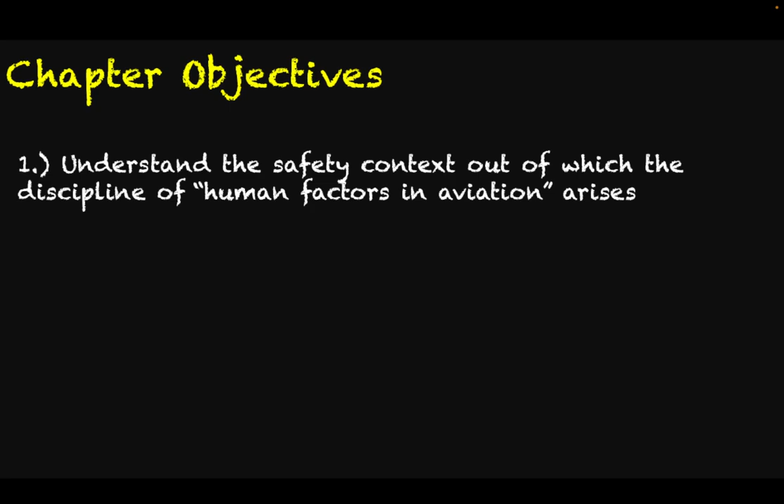So, more than anything else, you're asking, why do I have to take this class? Well, what we need to understand in this chapter is we need to compare the safety record of aviation against those other modes of transportation like driving, taking the train, taking a boat. You've heard your whole life that flying is the safest way to travel, and that's absolutely true. But at the same time, air travel is not 100% safe. Nothing is ever going to be 100% safe. Accidents do happen. So we also want to understand the types of aircraft accidents that do occur and the types that are statistically the most likely to occur.

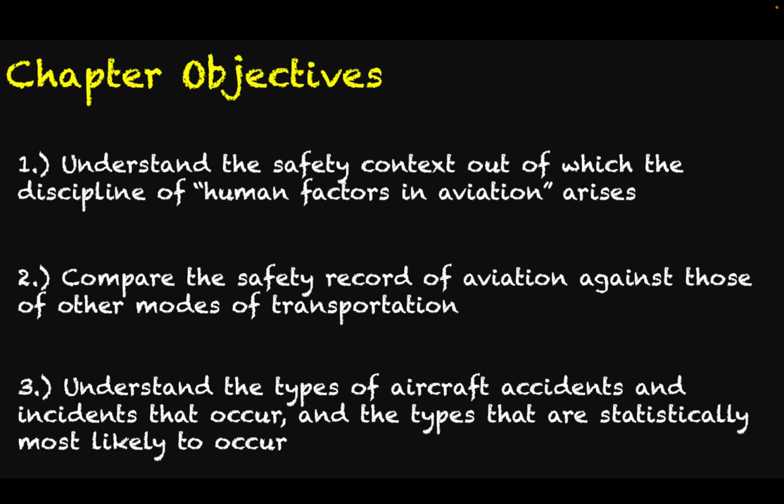And once we get through that, you're going to understand why you're having to take this class, because, not to give away too much, but we are going to find that pilot error, mismanagement of resources, poor decision making, lack of skill, these are all things that are disproportionately most likely to cause an accident. And that's why we need to study the human body. We need to be aware of what we're capable of and what we're not capable of so that we can make the proper decisions when we are in the aircraft.

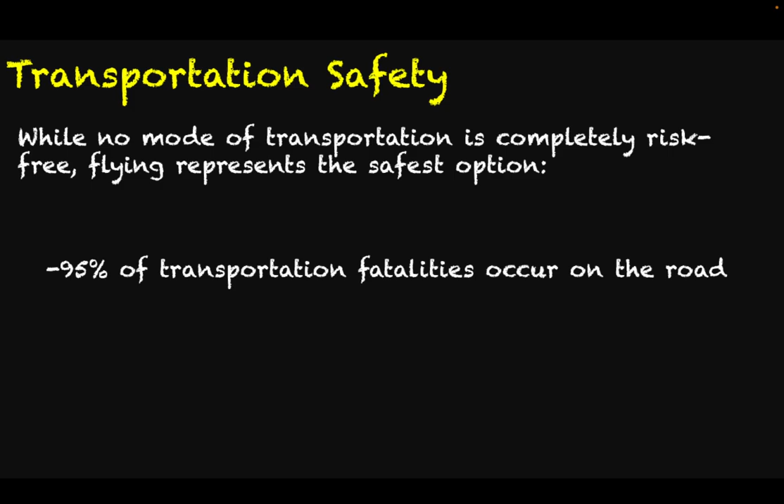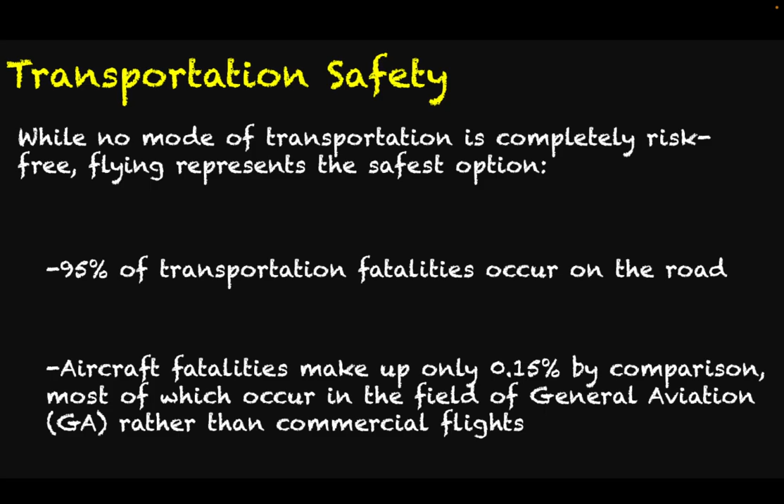So, like I said, no mode of transportation is going to be 100% risk-free, but flying does represent the safest option for sure. So about 95% of transportation fatalities occur on the road, and aircraft fatalities only make up a very small percentage by comparison, only about 0.15%, which is about 15 out of every 10,000. So if we split aviation up into two categories, being general aviation and commercial flights, and we'll better define these here in just a minute, most of these are going to occur in the field of general aviation. So there's lots of reasons why commercial flying is quite a bit safer than general aviation, and we will touch on that a little bit later.

So civilian aviation, like we just said, is divided up into two categories. We have general aviation. This is all civilian, meaning non-military flight operations other than scheduled commercial air passenger and/or cargo service flights. So this can include anything from recreational flights, sightseeing, instructional flights, corporate transit, and on-demand charter flights.

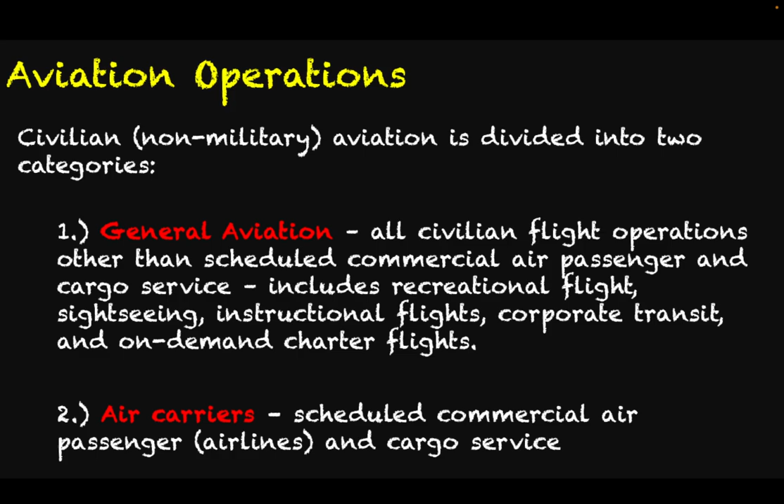And then air carriers are going to consist of two basic things: the airlines and cargo service. So for commercial airlines, you're talking about flights from Los Angeles to New York, and there's 300 people on board. Cargo service is going to fly very much the same kinds of planes, these very large turbojet planes, but they're going to be the ones that say, like, FedEx or UPS on the side. They're not really carrying people so much as they're carrying cargo.

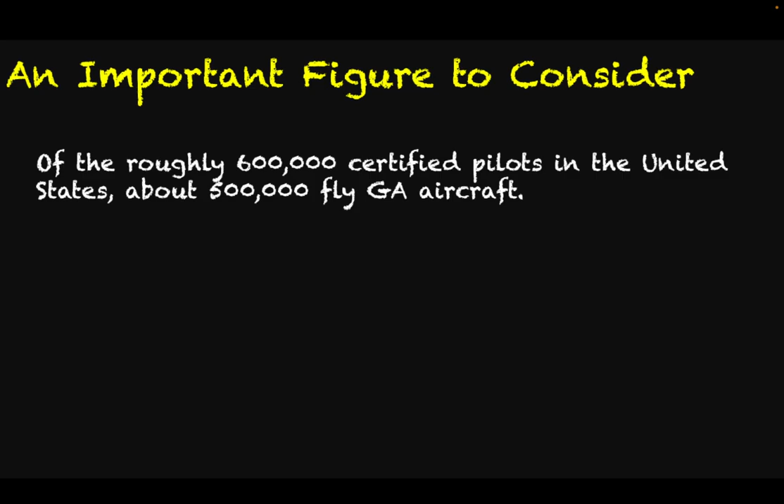So, of the roughly 600,000 certified pilots in the United States, about 500,000 fly general aviation aircraft. So, disproportionately, if you consider the entire fleet of aircraft in the United States, most of them are GA aircraft rather than commercial fleets. So the conclusion we can make is, just based on the number of takeoffs and landings, aircraft incidents and accidents are much more likely to involve GA aircraft just based on volume. So there's a lot more GA aircraft, and they're doing a lot more takeoffs and landings. Their flight times tend to be a lot shorter than what you see with air carriers. So just based on those data alone, it seems much more likely that you're going to have accidents, incidents, whatever you want to call them, with GA aircraft versus commercial aircraft.

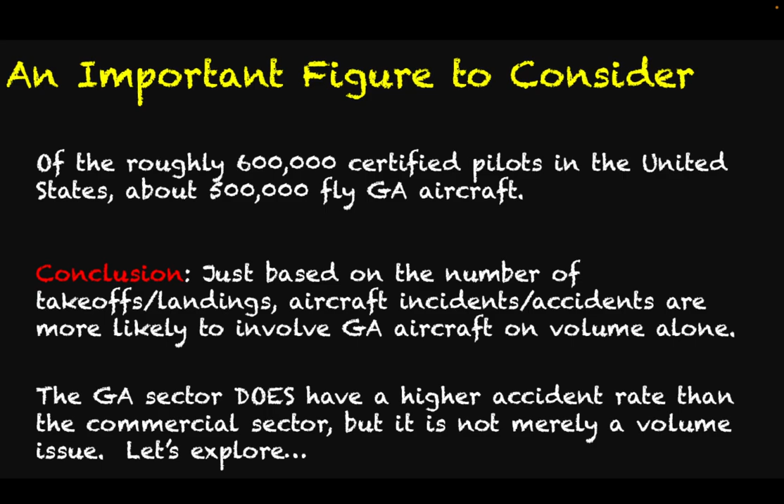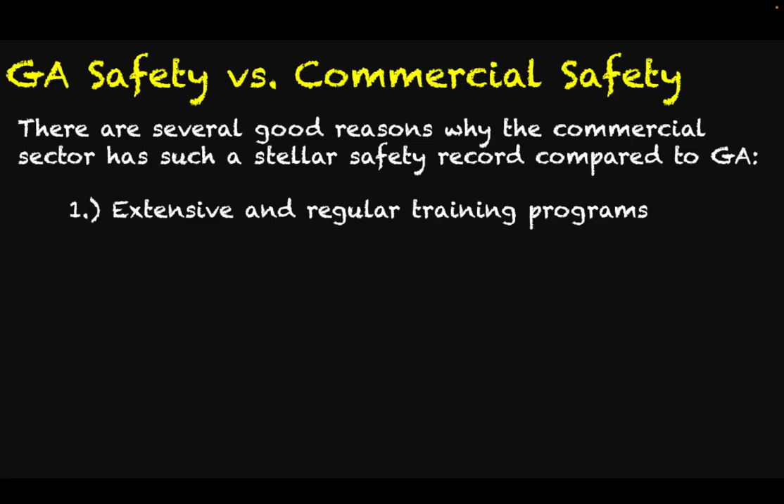But what we're going to see here is that it's not just a volume issue. The GA sector does have a higher accident rate than the commercial sector. So let's talk about safety in the GA sector versus safety in the commercial sector. There's actually several good reasons why the commercial sector has such a great safety record compared to general aviation. Number one, there are extensive and regular training programs available and required of commercial airline pilots that are not required of or maybe available to just regular GA pilots.

Number two, we have routine high quality maintenance on higher end multi engine aircraft. So not only are the commercial fleets flying much larger, much safer, much more sophisticated machines, those machines are being tended to in a much more careful, much more regular and much more methodical way than, say, just a Cessna that's sitting in a hangar at the airport.

Commercial airlines tend to have larger flight crews, so 2 or more experienced pilots. Whereas it's possible for a GA pilot to just hop in his airplane and then go fly solo. So, what that means is that for the GA pilot, if he or she is all by themselves, there's a lot of decision making, tasks that need to be accomplished, some of those being mental tasks. So it is all on that person to always make the right decision, make the right reaction to given visual references and things like that.

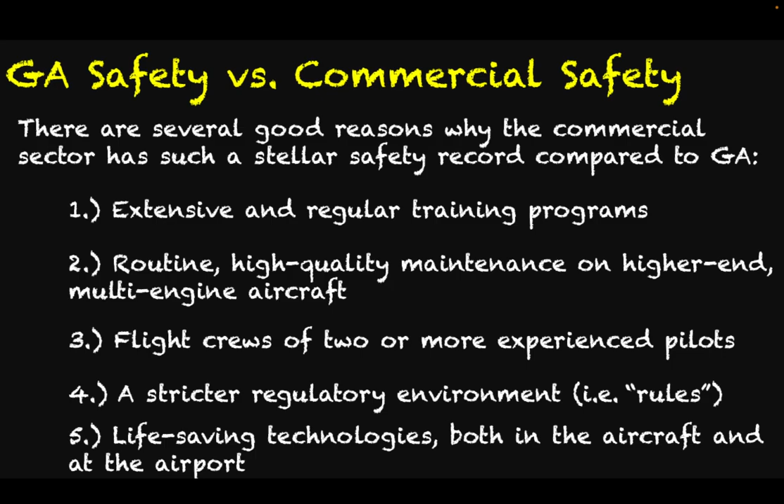Whereas on the commercial side, because you have 2, 3, or even 4 people in your flight crew, there is communication back and forth. Everybody is a part of the decision-making process. There are checklists that everybody can run through to make sure that everybody is making the right decisions at the right times. As you can, I'm sure, imagine, the commercial side of things has a much stricter regulatory environment, aka the rules. And then number 5, there tend to be life-saving technologies on board commercial flights that are just maybe not present in GA aircraft. Things like collision avoidance technology, terrain detection technology, and things of that nature.

So if we want to focus on some of the commercial regulations so that we have a better understanding of why commercial aviation just tends to be so much more overwhelmingly safer, they have standard operating procedures, and these manifest themselves as checklists that basically spell out a step-by-step list of instructions for every phase of flight, and this is intended to minimize the risk of missing important steps, skipping important steps, misreading or misinterpreting certain steps, and this is where having a larger flight crew also lends itself towards being a bigger benefit as well. If you have multiple people as part of the checking off process of going through these lists, that minimizes the risk of error, and it won't totally mitigate the possibility of an accident, but it will greatly reduce it.

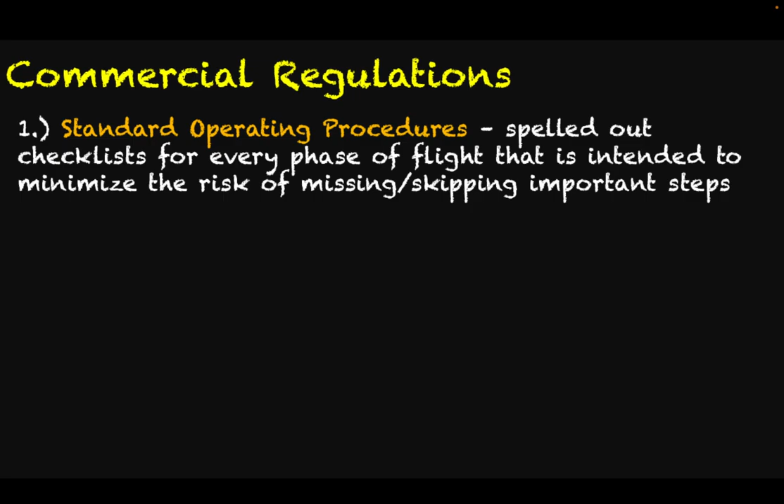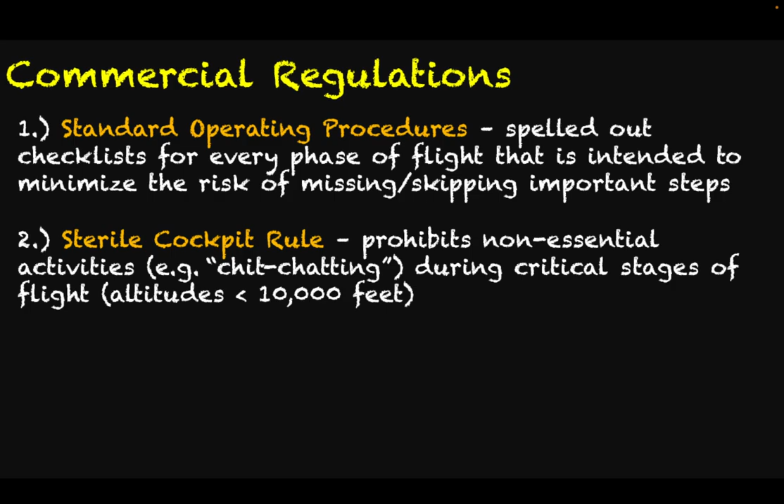There is what is called the sterile cockpit rule, which prohibits non-essential activities. Usually you're talking about things like chit-chatting, shooting the breeze, things like that, during critical stages of flight. And usually by critical stages of flight, we're talking about altitudes that are below 10,000 feet. So once you're up at cruising altitude, the sterile cockpit rule doesn't really apply. But when you're that close to the terrain, you have to be basically laser focused on what you're doing, your bank angles, your flaps, and things like that, to make sure that you are doing, from a regulatory standpoint, all the right things to ensure the safety of the crew and of the passengers as you fly.

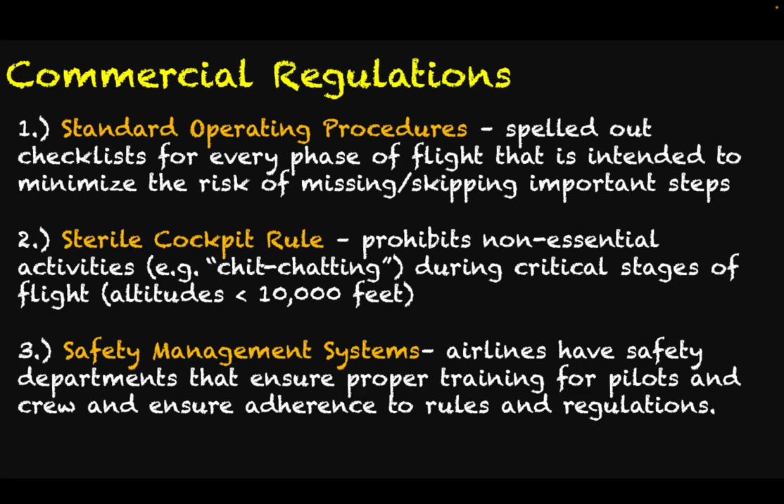There are safety management systems, so airlines have safety departments that ensure proper and regular training for pilots and crew to make sure that when you're talking about things like rules and regulations and standard operating procedures, everybody knows what they're doing, what they're supposed to be doing, and how to do it. So the strict regulatory environment of commercial flight is meant to mitigate problems that result from human limitation and error. So the biggest takeaway from this chapter is hopefully going to be, if there's going to be an accident involving an aircraft, it is overwhelmingly likely that it is going to be because of the actions or inactions of the pilots involved.

We tend to sometimes think about airplane crashes or airplane incidents that involve mechanical failure, an engine flaming out on you, hydraulics going out on you, the tail falling off, the rudder not working. So these are all mechanical failures that have nothing to do with human limitation and human error. But those things are overwhelmingly much more rare compared to incidents that involve humans making mistakes, okay? So that is one of the most important takeaways that you're going to get from this chapter. It is almost certainly going to be human error that causes an accident versus something like a mechanical issue.

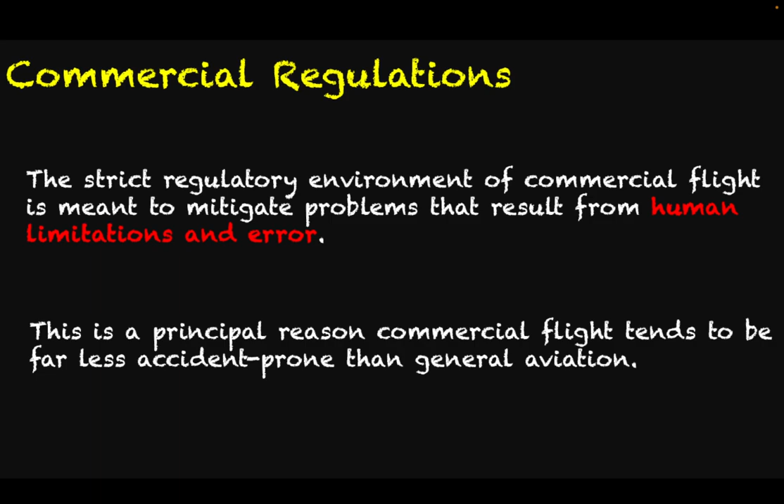So this is a key and critical reason why commercial flight tends to be far less accident prone than general aviation, because of everything that we just looked at in the previous slide. There are steps and regulations and technologies that are in place in commercial aviation to mitigate the possibility of human pilot error becoming a causal factor in an accident.

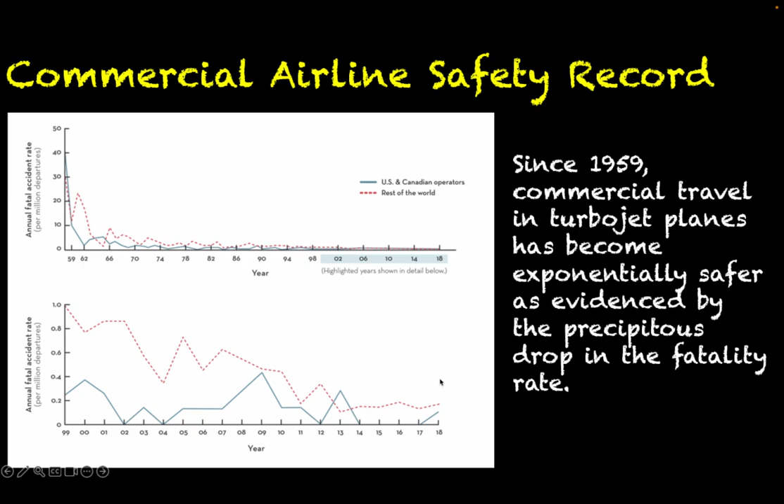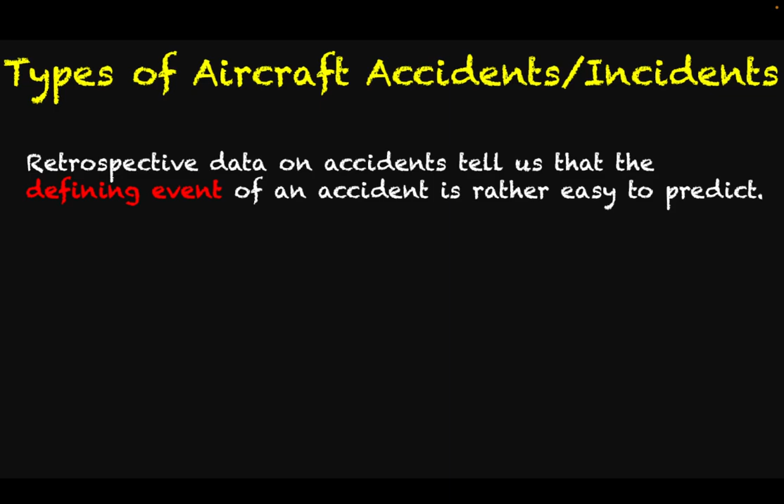So now let's switch gears a little bit and talk about the different kinds of aircraft accidents and incidents so that we can better understand what part of those accidents and incidents is most likely to be caused by human error, that is, action or inaction of the pilots involved. Retrospective data on accidents tell us that the defining event of an accident is actually kind of easy to predict. So, statistically speaking, some types of accidents are more likely to occur than others.

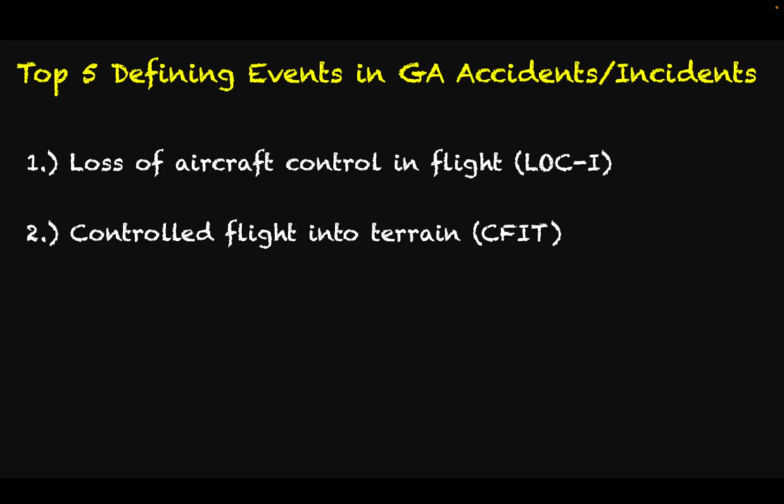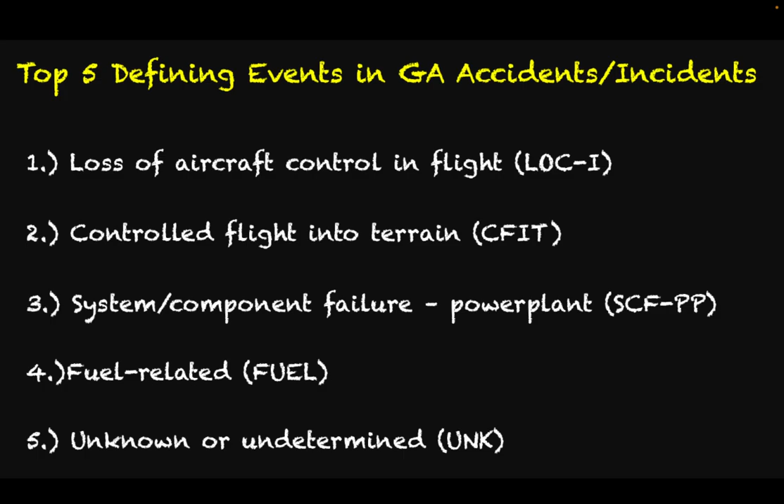So the FAA compiles a list of the most common defining events in accidents and incidents. The most common and most likely kind of accident is called loss of aircraft control in flight, or you can call this LOC-I. Second is controlled flight into terrain, or CFIT. Third is a system or component failure involving the power plant or engines, so this is SCF-PP. You have fuel-related incidents, which we will talk about a little bit later. That's not strictly one kind of thing, but multiple kinds of things. And then unknown or undetermined. So sometimes accidents happen and we just can't really figure out exactly what went wrong.

And then there are other defining events in GA accidents and incidents, so it's not just the 5 that we just looked at. The 5 that we looked at on the previous slide are the most common. So there is actually a laundry list of types of defining events or occurrences involving system component failure that don't involve the engine, unintended flight into instrument meteorological conditions, which basically means that you lose your visual references because it's nighttime or because it's cloudy. Mid-air collisions, low altitude operations, so you're flying a lot lower than you're supposed to, or there's others as well.

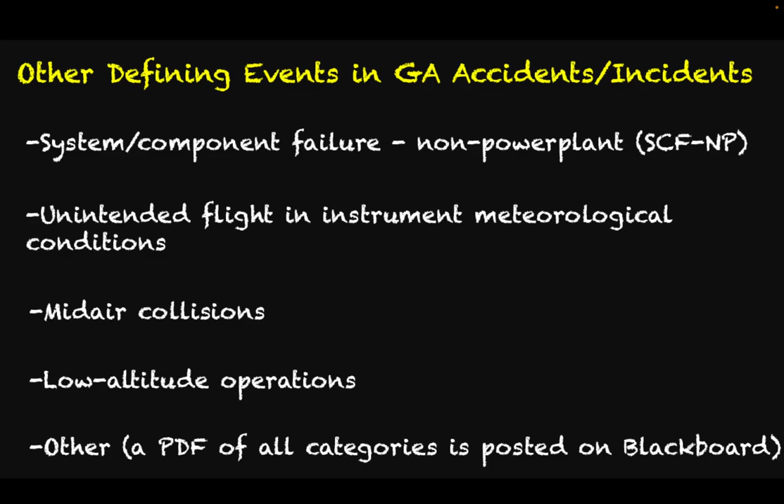And to help you understand some of these occurrences and some of these defining events, I posted a PDF of all the different categories of occurrences and defining events on Blackboard. Take a look at that. That will provide definitions and some important context that should help you understand what these things are and why the 5 that are most common that we looked at are the most common.

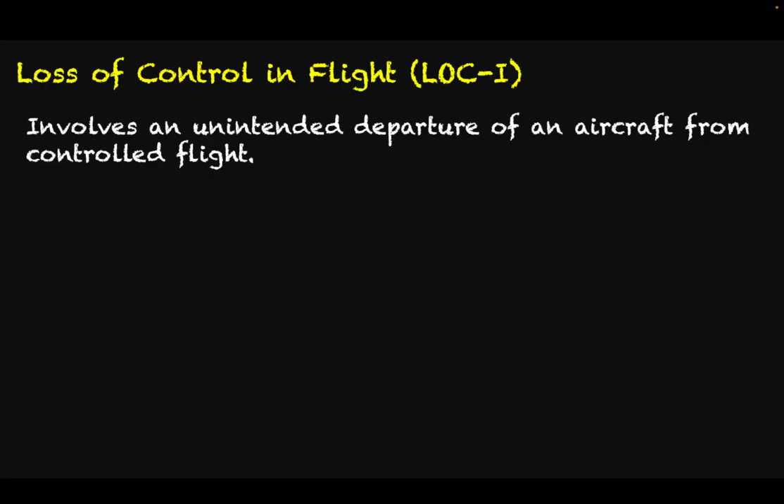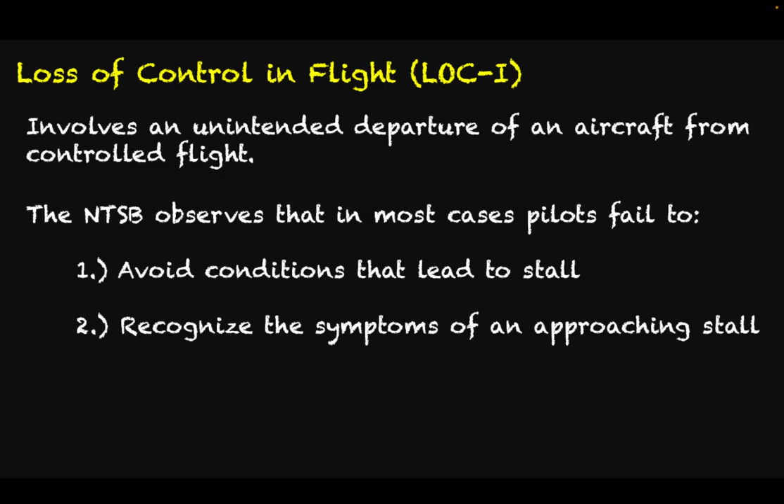So real quick, let's take a look at loss of control in flight and understand what that is all about. So LOC-I involves an unintended departure of an aircraft from controlled flight. So basically, you lose control of the aircraft for whatever reason, okay? So the NTSB observes that in most cases of LOC-I, pilots fail to, 1, avoid conditions that lead to stall, 2, recognize the symptoms of an approaching stall, and 3, use proper stall recovery procedures.

Now, of course, we know that stall involves things like loss of airspeed, inappropriate attitude of the airplane. So basically, you get to the point where the airplane cannot generate the lift to keep itself airborne, and it's going to start falling out of the sky. So these three things that you see right here are going to obviously cause you to lose control of your aircraft, okay? But this, again, becomes kind of a training issue. It becomes a compliance issue. Understanding how your airplane operates and how to handle it so that you can mitigate the risk of stall.

So, in other words, this occurrence is an issue of human cognition and decision making, okay? So, when you're learning to fly, you learn all about aerodynamic stall and how to avoid it at all cost. What sorts of things should you be doing to avoid stall? What sorts of things should you not be doing to prevent yourself from stalling?

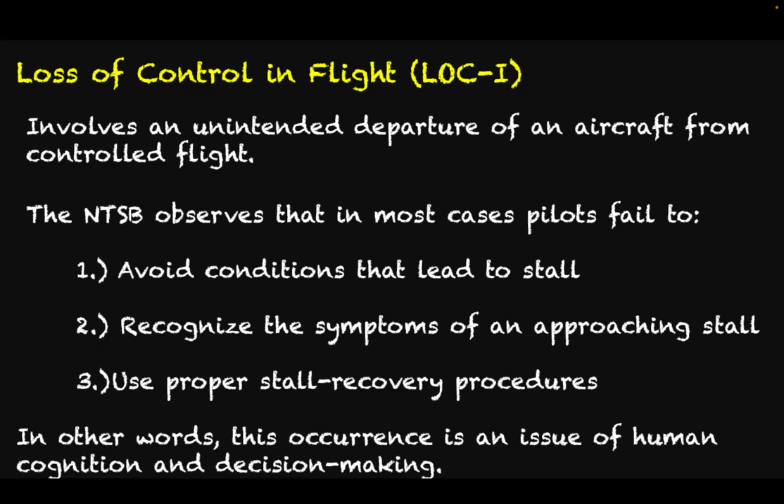So again, this becomes an issue of human cognition and decision making, which we are going to eventually see is a human physiological issue. You need to understand how your body operates and how your brain works so that you can understand, okay, I may think I can get away with a certain attitude or a certain bank angle or a certain airspeed so that I won't stall, but your brain is flawed. That's kind of the main thing I'm going to try to get across to you in this class. The human body is an amazing thing that's capable of amazing feats, but the human body is flawed, okay? So if nothing else, you need to trust your training and trust your instruments. They basically are going to know better than you.

Okay, so let's lay out a couple of definitions so that we can understand the sorts of contributions that different conditions make to the two most common types of aircraft defining events, LOC-I and CFIT. So the first definition we're going to have is VFR, which stands for Visual Flight Rules.

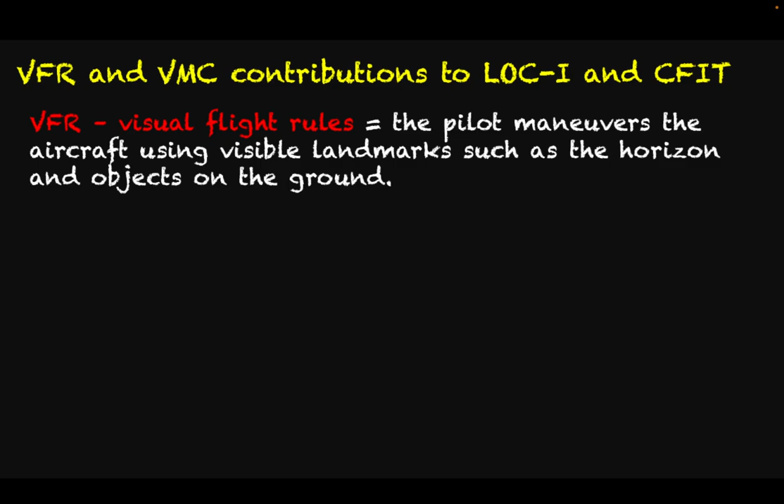So this is going to involve the pilot maneuvering the aircraft by using visible landmarks such as the horizon and objects on the ground. So basically, visual flight rules are going to be applying in visual meteorological conditions, which is a meteorological state in which outside references are readily visible and VFR can be conducted safely.

So another way of putting this is that VMC is in effect when you have a clear day outside, it's daytime, the sun is shining, you can see the horizon, you can see objects on the ground. You basically can use your eyes and know that you're at level flight with the horizon. You know you're not about to fly into a mountain. You know you're not about to crash into the ground.

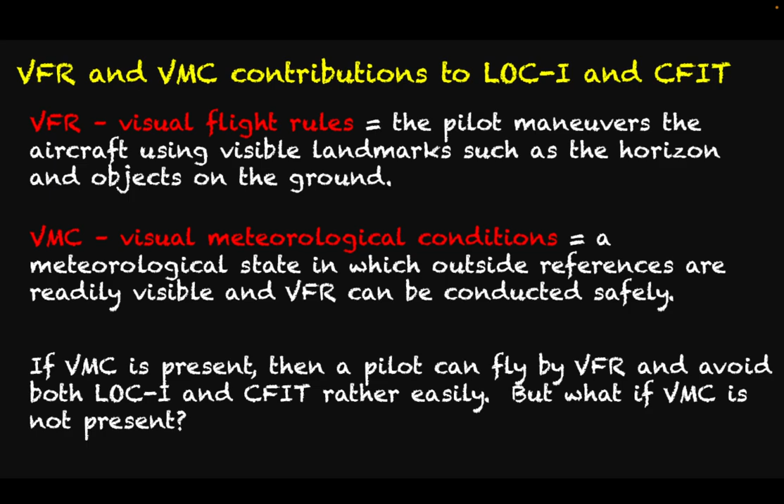So when VMC is in effect, you can fly by visual flight rules. So that's a safe thing to do, okay? So if VMC is present, then a pilot can fly by VFR and avoid both LOC-I and CFIT rather easily. But the question becomes, and this is going to be kind of a common question for us in this chapter, what if VMC is not present?

So when a pilot attempts to fly by VFR in conditions of low visibility, meaning not VMC, so it's nighttime, it's overcast, you can't see the horizon, you can't clearly see objects on the ground, that's called IMC, or instrument meteorological conditions, you increase drastically the chances of something happening called spatial disorientation, in which you're flying your airplane, but you don't really have any sense of where you are, whether you're flying level with the horizon. You could be flying straight, you could be flying straight towards the ground. You're not necessarily going to know.

So if a pilot is only rated to fly by VFR, we want to minimize the risk of spatial disorientation by making sure that we're only flying in VMC. Once you lose those visual cues, the horizon or objects on the ground, it's very easy to become disoriented. And once again, this is a physiological process. This is a process that's happening inside your brain. Your sensation of knowing where your body is positioned with respect to the ground and other objects.

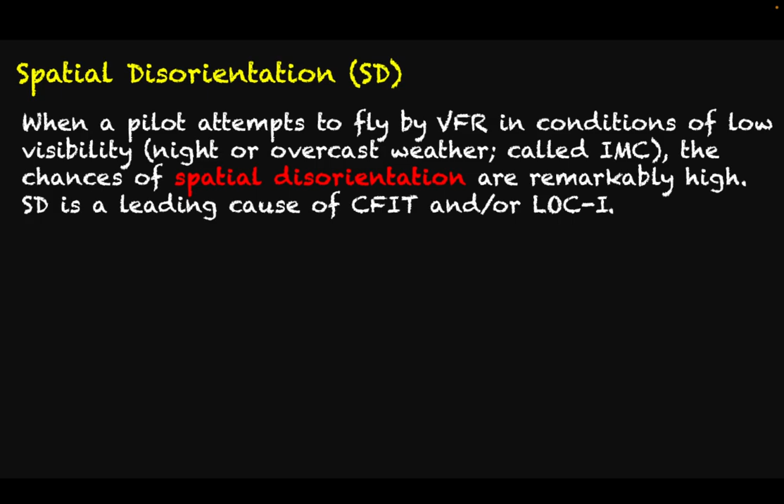So spatial disorientation is a leading cause of both CFIT and LOC-I. The conclusion we can make from this is that pilots that are not instrument rated should not fly when visual references are not available due to the increased likelihood of spatial disorientation occurring.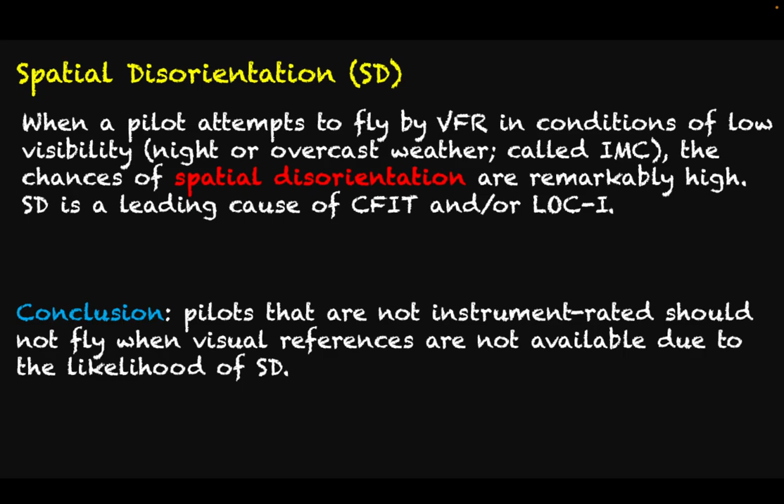So, the use of these visual landmarks during VMC to help maneuver the airplane is going to involve very fast communication using the nervous system. So, this is a physiology topic. So, with that being a physiology topic, but at the same time, with this not being a biology class, I'm not going to teach you the nitty gritty details of how communication in the nervous system works or any other physiological process, but I am going to teach you the surface level details that you need in order to understand what your body does, what it's capable, and what it's not capable of.

Okay, so let's say that you're flying by VFR and you're flying through VMC. So you're using visual references like the horizon in order to keep level flight and to keep your correct heading. So when light hits your eyeball, so this is your eyeball right here, that light is going to stimulate cells in the very back of your eye. The very back of your eye is called the retina. The retina contains a type of cell called photoreceptor cells, which absorb light that is entering your eye, such as during the daytime.

And the retina cells get excited and send a message through your optic nerve to the occipital lobe of your brain. So your brain receives this electrical message that is conveyed through your optic nerve. The brain receives that message, processes the information, forms a picture that we see, and then the image that we see after this information is processed in our brain allows us to send a message through another nerve to the muscles that are in our arms and in our hands.

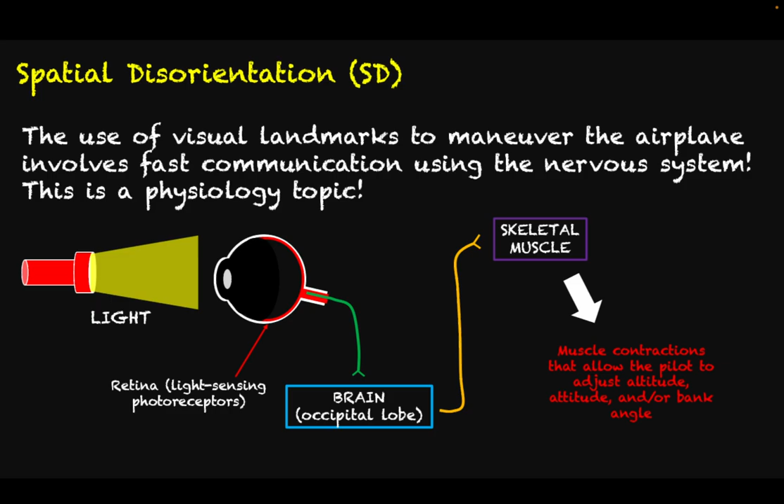So because you are changing the direction and changing the heading of your airplane based on the things that you see, we need this communication to happen very fast. And this communication, what I'm trying to get across here, is a physiological process, and that's one of the things we will explore a little bit in this class, in a later chapter, of course.

Okay, so just real quick, if we talk about fuel-related occurrences, most of these are going to consist of one of two things. Number one, fuel exhaustion, which is the aircraft completely running out of fuel, or number two, fuel starvation, in which the aircraft still technically has fuel, but for whatever reason, that fuel can't be routed to the engines. So either that is an operation issue on the pilot side, or it's a mechanical issue and the fuel's not flowing from the wings to the engine.

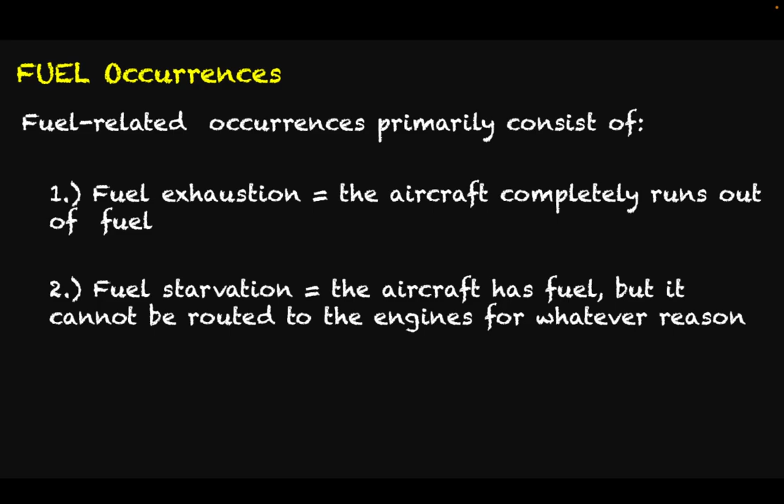So about 95% of fuel-related accidents actually entail pilot error. If you end up with fuel exhaustion, that's 100% avoidable, and that's 100% a pilot error. It's the same thing like if you're driving on the road. If your car runs out of gas, that's kind of your fault, isn't it? It's your fault that you didn't fill up your car before the lack of gas in your car became an issue, right? So that's your fault if that happens to you. It's the same thing with an airplane.

You're talking about a pilot getting cocky, thinking, oh, I can fly a little bit further without running out of fuel. So it's an overconfidence issue. And the thought process behind why you might end up with fuel exhaustion, or you might flip a switch incorrectly to transfer fuel from one side of the airplane to another, these are skill issues. These are physiological issues. They involve the function of the human body and the function of the human brain, which I've said a couple of times already. The human brain and the human body are flawed. They are limited. So understanding those limitations and always siding on caution is going to be the thing to do to mitigate risk of things like fuel-related occurrences.

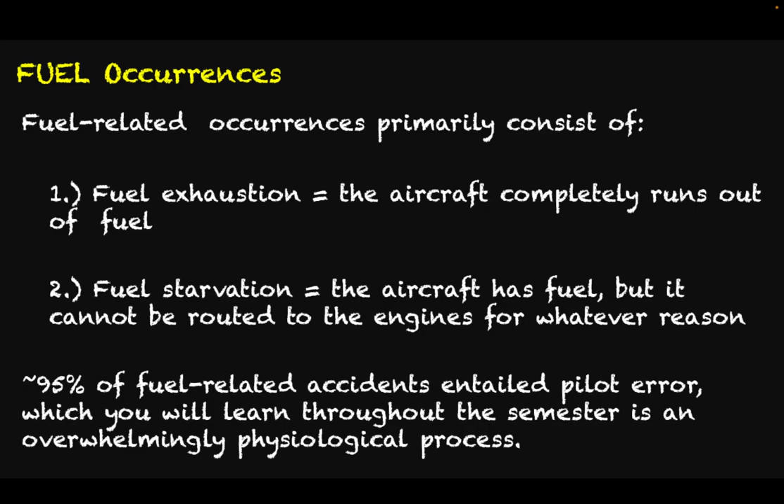So I've said it already, but I'll say it again. Pilot error is overwhelmingly more likely to be a cause of an accident than some kind of mechanical failure. Now, mechanical failures are kind of fun to depict in popular media and things like that, but they're overwhelmingly rare. Okay.

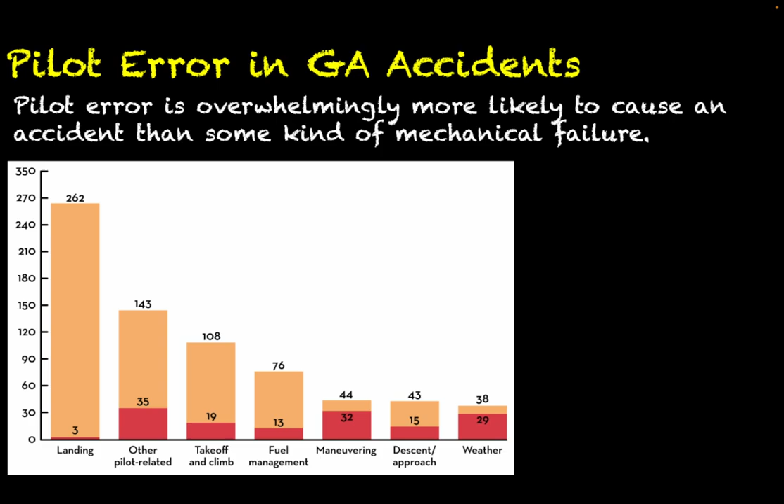So if you look at this graph here, we can see that things like landings are an issue, other pilot-related incidents are an issue, takeoff and climb, fuel management, maneuvering. A lot of these things involve pilot skill, the ability to make correct decisions, responding to things with quick and appropriate reflexes, responding to visual cues. These are all matters of human body function. So again, this implies a great importance on the study of human factors and the study of human physiology in understanding what your human body is capable of, what its limitations are, so that we can avoid these things from happening.

So the previous slide showed us that landings are most likely going to be where accidents occur, even if they are not particularly fatal. So if we go back and look at this, we can see that of the different types of accidents that occur, by far the most likely is a landing, but the red bars, which signify fatalities, of the 262 landing-related accidents that were captured in the study, only 3 of them involve fatalities.

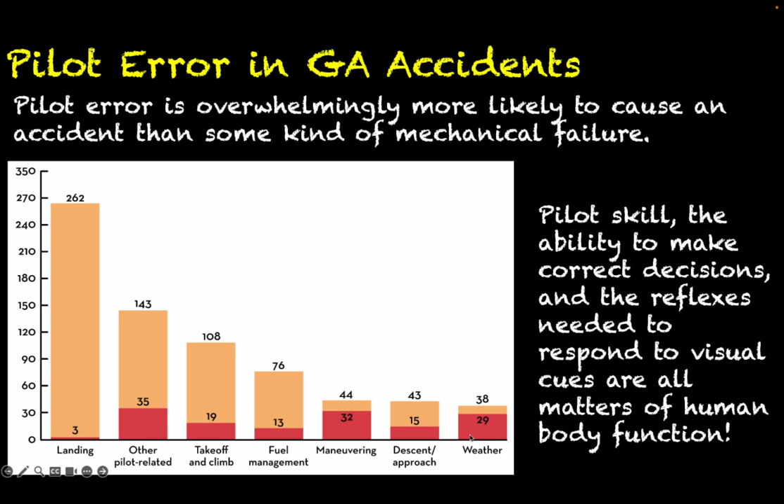Okay, but one other thing that you might find interesting here is that weather, which is not exactly a human decision-making issue unless you're talking about flying VFR into non-VMC conditions, is something that's not technically in our control, right? Even though we can control ourselves not intentionally flying into bad weather. So weather, even though it's not the most common type of accident, is proportionately the most fatal type of occurrence. So of the 38 occurrences, 29 of them involve fatalities.

Okay, so back to what we were saying, the previous slide showed us that landings are most likely to be where accidents occur. So most of the landing accidents still relate to pilot skill errors. They still relate to things like decision making and planning. So these are all human brain related cognitive events that once again necessitate the study of human physiology and the study of human factors.

So one thing you're noticing so far in this chapter is we're focusing on aviation safety, but a lot of what we're doing is definitely justifying the existence of this class, justifying the necessity of studying how the human body operates so that we can better understand how our bodies interact with the aircraft that we fly.

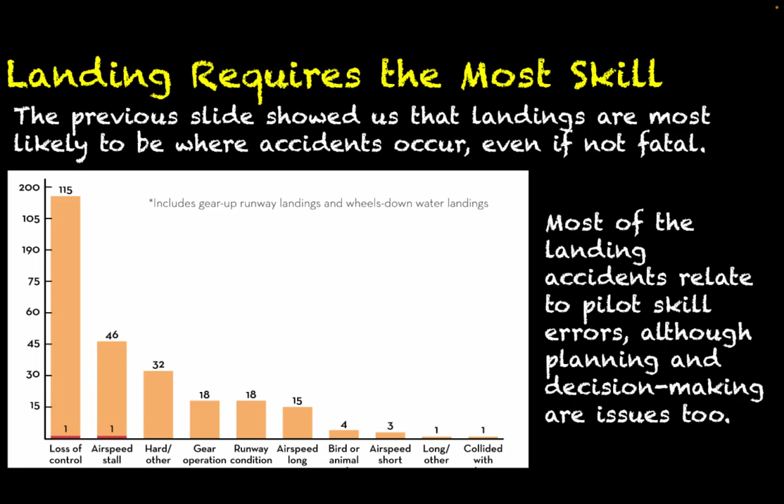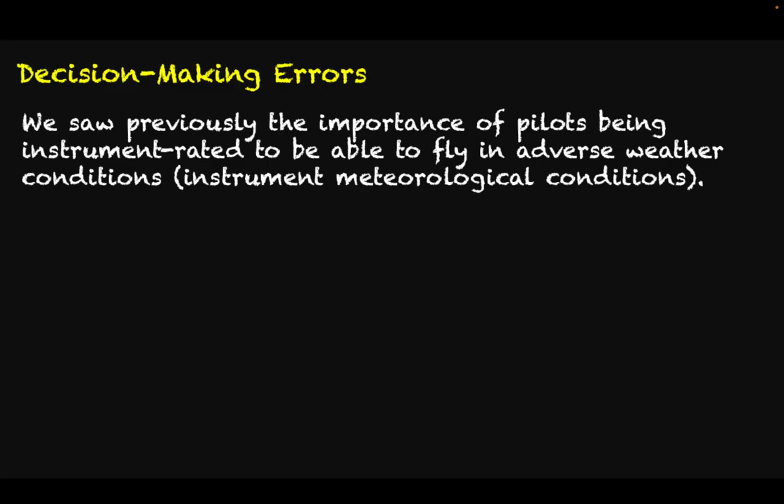Okay, so let's talk a little bit about decision-making errors. We saw previously the importance of pilots being instrument rated to be able to fly into adverse weather conditions. So we call those instrument meteorological conditions, whether it's nighttime or it's cloudy. If you don't have your visual references, that is not VMC anymore. That is IMC. And if you're not instrument rated, like we said before, you should not be flying into IMC.

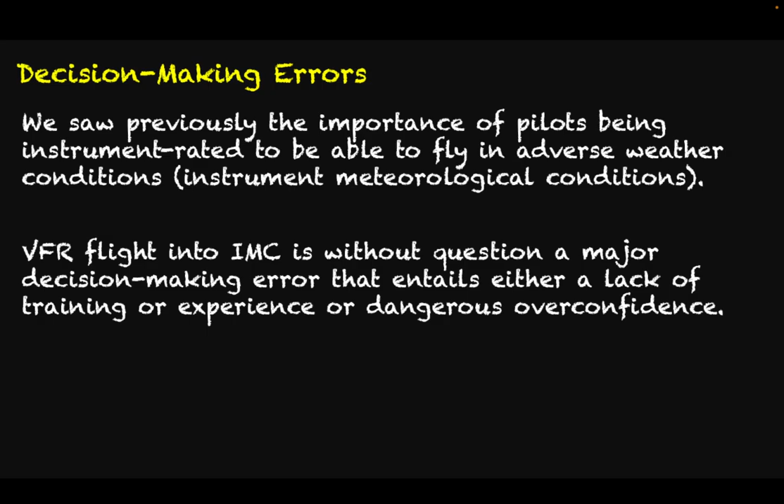So VFR flight into IMC is without question a major decision-making error. It's kind of like letting your airplane run out of fuel. So it entails either a lack of training or experience or the possession of a dangerous amount of overconfidence. So a study from the University of Illinois showed us that it only takes an average of 178 seconds for a non-instrument rated pilot to completely lose control of their aircraft once visual references are lost.

So what that's implying is you may think you're maintaining steady flight, but without those visual references and without the ability to rely on your instruments to maintain controlled flight, you're going to lose controlled flight in about 3 minutes. It's crazy, right? So some 95% of VFR into IMC accidents are fatal. So this is a big deal. So decision-making errors are absolutely a big part, a big contributor towards aviation accidents.

And again, this just leads you to believe that you need to understand what the human body, your brain, and your sensory perception is capable of and what its limitations are. Because again, if you lose those visual references, you may feel like you're maintaining steady flight. You may not feel like you're banking or that you're losing altitude or that your nose is pitching down, but those things are very slight. It's very hard to feel those things.

And once you get on a certain bank angle or once you reach a certain attitude, your body adjusts to that and will no longer be able to distinguish a pitch down nose from steady horizon level flight. So this is why it takes so little time for you to completely lose control of your aircraft unless you are an instrument rated pilot.

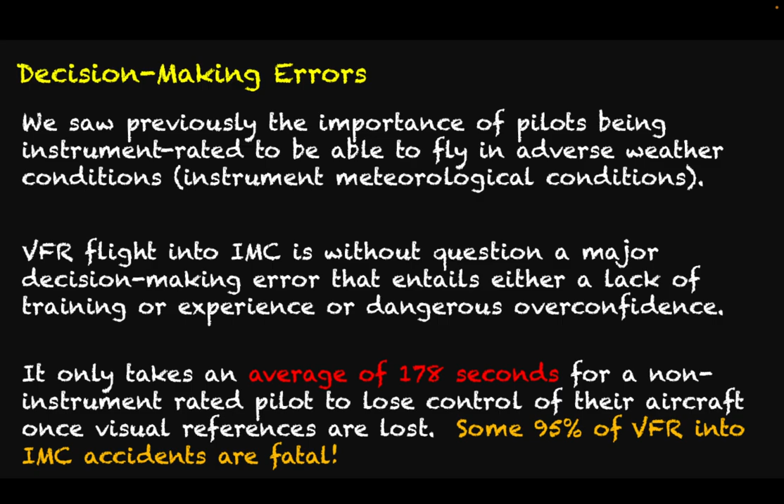Okay, so a lot of what we've just talked about involves GA aircraft, which is statistically most likely where the accidents are going to occur, right? So let's talk just a little bit about air carrier incidents. So similar to GA, CFIT and LOC-I represent the most common kinds of fatality-causing accidents for commercial aviation, but it's kind of a scary thing if you look at this graph because this is just a raw number of fatalities in the amount of time this study was done.

You're seeing for loss of control in flight, almost 1,200 fatalities, CFIT about 550 or 560, unknown 329, runway excursions, which we'll talk about a little bit later. So these bars look kind of scary. It looks like these things are very common, but you need to look at the context down here. Even though the number of fatalities is very high, that is a product of commercial airlines carrying a lot of people per flight. So one accident is going to likely kill 300 people, right?

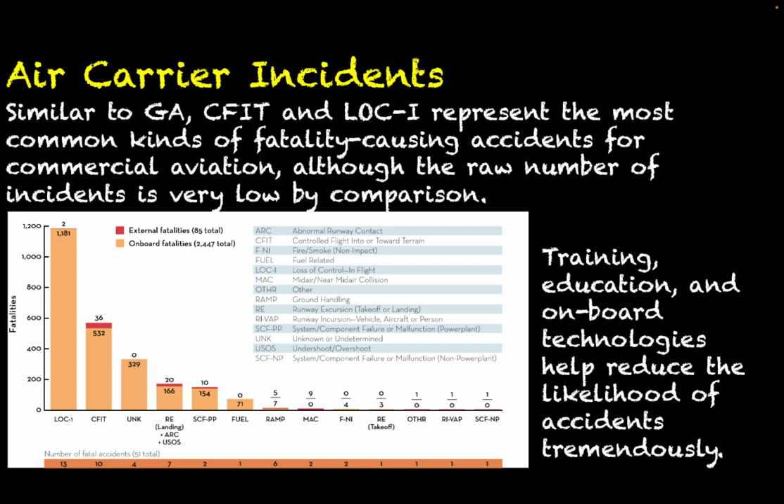So the actual number of individual accidents is actually very low. Across the whole board here, there were only 51 total accidents, spanning a very exhaustive study done over many years. Now that I'm looking at the textbook, this was between 2009 and 2018. So we're talking about 10 years of data here. So over 10 years, we're only averaging about 5 accidents per year. So again, a big reason why air carrier travel is disproportionately more safe than GA travel: training, education, and onboard technologies help to drastically reduce the likelihood of these accidents occurring.

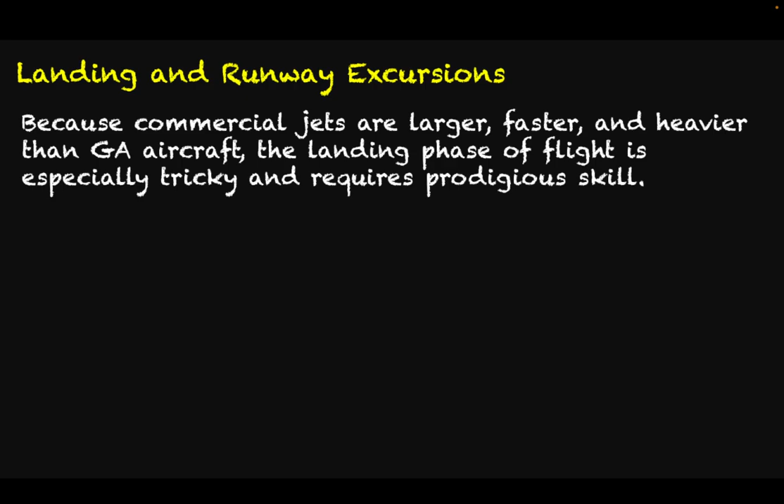Okay, so one thing we saw before is that by far the most dangerous phase of flight, where an accident is most likely to occur, is the landing phase. We saw that borne out in the data from figure 1.3, which was GA data. Well, it's very much the same way for commercial jets as well. The landing phase of flight is very, very dangerous and requires a prodigious amount of skill. But for commercial aviation, you're dealing with an extra complication. You're flying bigger, faster, and heavier aircraft than you would in GA, so the landing phase of flight is going to be especially tricky.

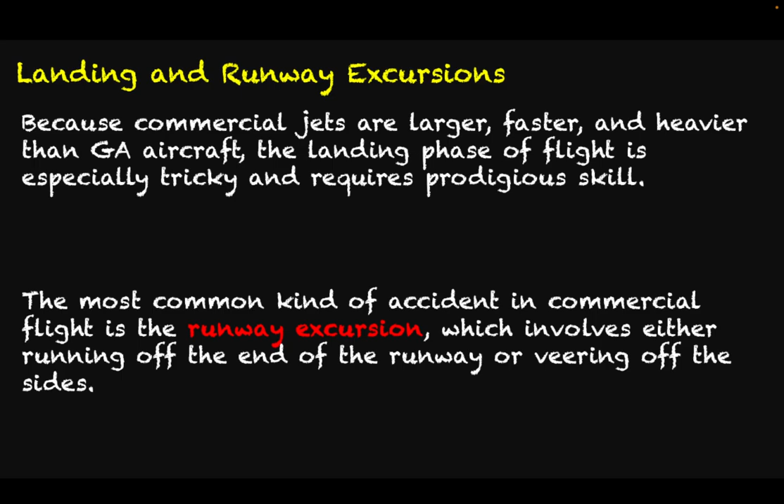So the most common kind of accident that you see in commercial flight is the runway excursion, which involves either running off the end of the runway because you couldn't stop in time, you couldn't get the wheels down in time, or veering off the sides, either because of crosswinds or just not being a very good pilot, which I'll just leave it at that. So runway excursions are distinct from runway incursions, which you can look up on your own. We're mainly talking about excursions here.

But if you look at figure 1.5 from your textbook, what you're seeing here is data that shows the likelihood, or statistically the likelihood, of a fatal accident occurring during different stages of flight. So you have taxi, loading and unloading, you have the takeoff phase, you have your initial climb, your climb after you get the flaps up, you have cruising altitude, you have your descent from cruising altitude, your initial approach, your final approach, and then finally the landing.

So if you're looking at just the data with fatal accidents, you can see that fatal accidents are most likely to occur in the final approach and landing, which doesn't seem that much more than, say, cruising altitude or your climb to cruising altitude. But you have to consider the exposure. If you wanted to think of it as a fraction, the exposure or the percentage of flight that each phase makes up is kind of like your denominator.

So cruising represents 14% of fatal accidents, but that's actually pretty good considering that cruising represents almost 60% of flight time. You are almost twice as likely to have a fatality in the final approach or landing, even considering they only together make up about 4% of flight time. So you can do the math and figure out that it's something like 100 or 200 times more likely for an accident to occur in final approach or landing as compared to something happening while you're at cruising altitude. So the conclusion we can draw here is that landing and approach represent by far the most dangerous phases of flight, considering how little time is actually spent on them compared to something like cruising.

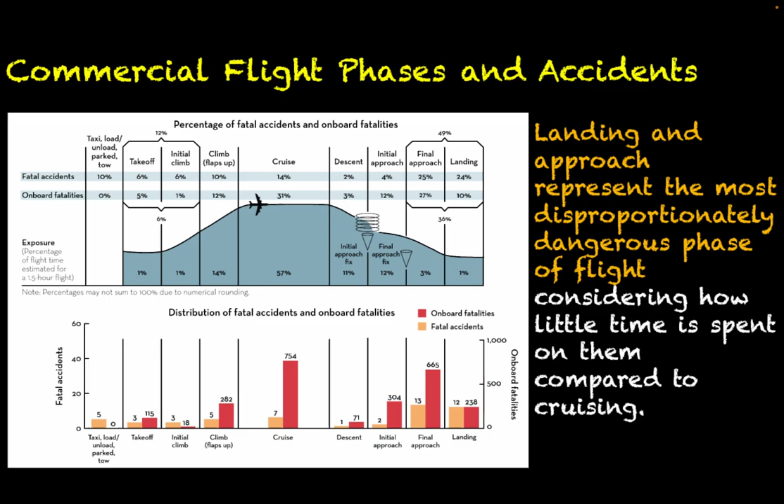So ultimately, it's important for us to recognize that the advancement of aircraft technology over time has been extremely rapid. Back in the very earliest parts of aviation, you lost airplanes and you lost people in airplanes a lot because the technology wasn't really that good. You had mechanical failures all the time. So if you've ever seen the movie Unbroken, it's about World War II. It's about a guy who ran as an Olympic athlete, and then he got drafted into World War II, and he flew as part of a B-24 bomber crew. The book that movie is based on details just how common it was for airplanes to go down because of mechanical failure. So the point I want to make here is we don't live in the 1940s anymore where airplanes break down all the time.

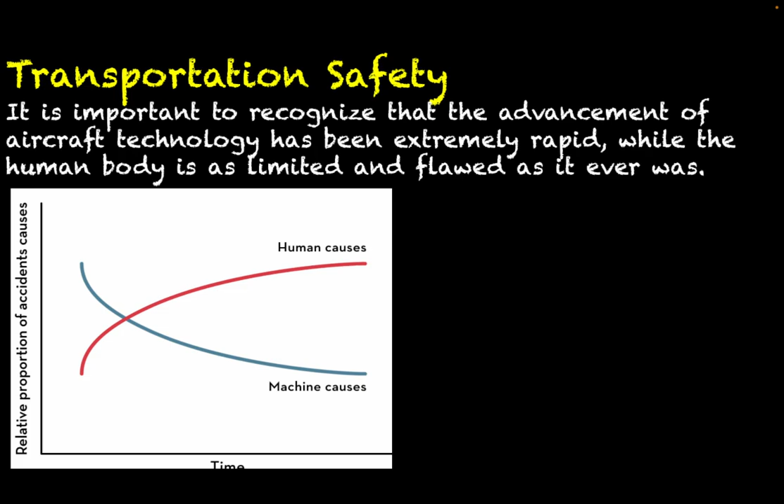Now, regular maintenance is, of course, important, but airplane technology has gotten so good that over time, the number of accidents that are being caused because of mechanical failure has gotten really, really low and continues to go down all the time. But disproportionately, as those go down, accidents that are being caused because of human pilot error, the actions of the pilot or the inactions of the pilot, are going up. So aircraft technology gets better and better over time, but the human body is as limited and as flawed as it ever was. Humans are not getting better. Airplanes are getting better, but because it still takes a pilot to fly an airplane, the risk of an airplane accident is never going to be zero because of the nature of the person flying the plane.

So why is the study of human factors so important? Well, it's important because the data say that the most likely cause of an airplane accident is the actions or inactions of the pilot involved, not mechanical failure. That's not to say that the engine can't flame out or something might break off of an airplane. Those things can and sometimes do happen, but it is much more likely that an airplane incident is going to occur because of a poor decision-making issue or because of something going on in the human body of the pilot or in their brain, something affecting their cognition.

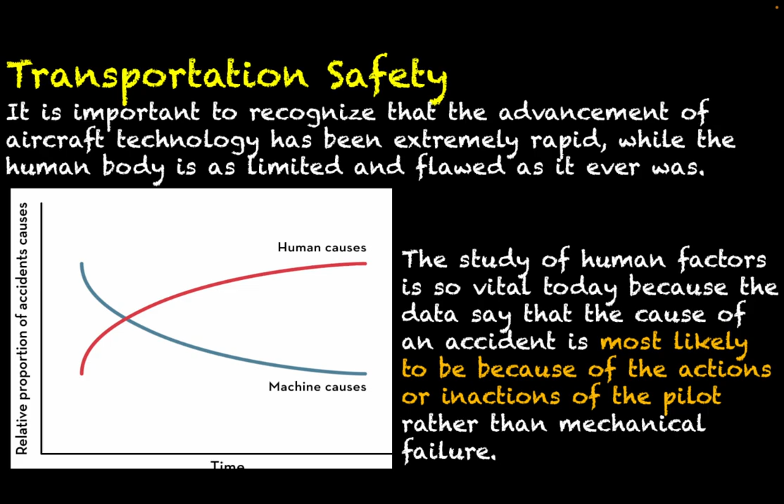This is why we study this discipline. This is why we study human physiology, so that you can understand the nature and the dynamic of how your body interacts with the different components of the airplane, so that we can get them to work together in harmony to make sure that we fly safely. All right, that is going to do it for Chapter 1.